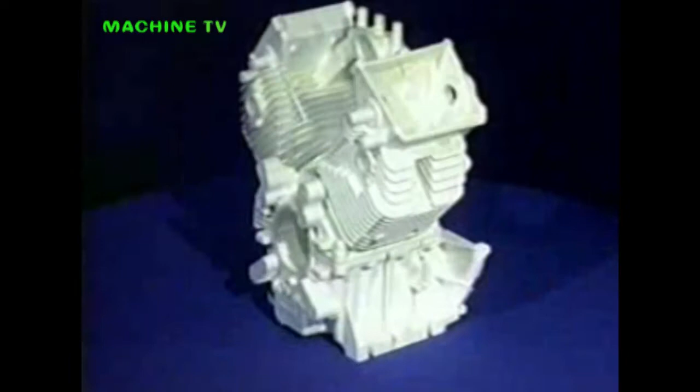The innovative metal casting process of the future is here today. Lost foam casting has been slow to develop, but is finally a technical and commercial success. The name lost foam refers to the process of creating a foam model of the casting and then replacing the foam with molten metal. The process begins with polymer beads, which must be expanded to a controlled low density for molding.

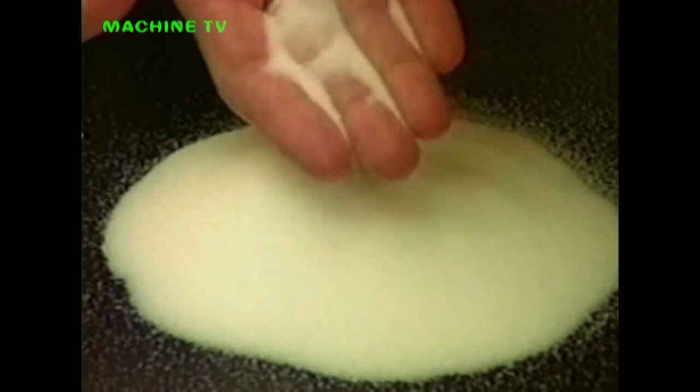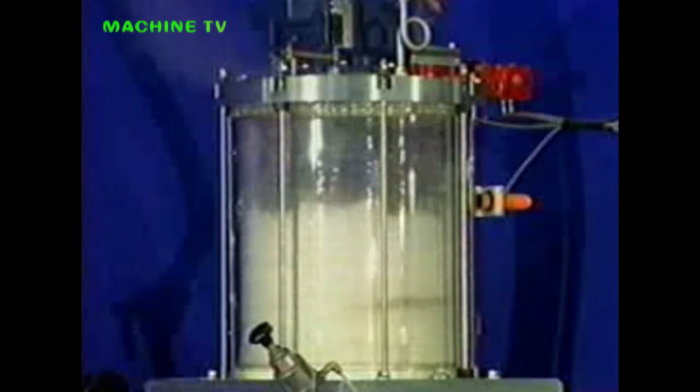The beads as purchased have a cellular structure and contain a gas or blowing agent, usually pentane. In a pre-expander, steam is used to heat the beads, softening the polymer and expanding the gas. Control of density and bead distribution is critical in this operation. After pre-expansion, the beads must be stored for stabilization before use in molding. A distribution system delivers beads from storage to the molding machines.

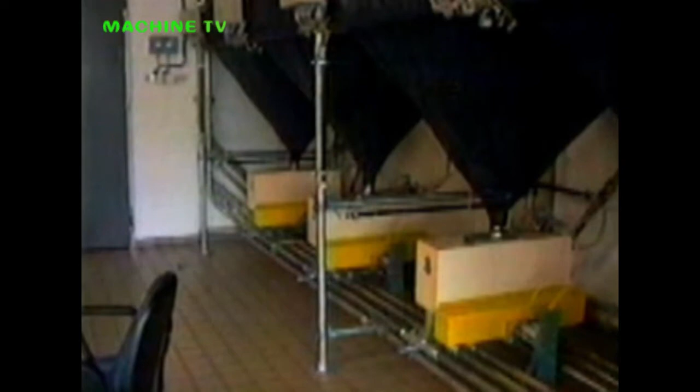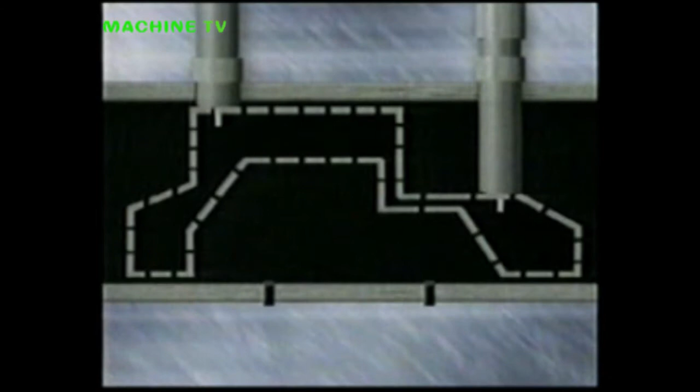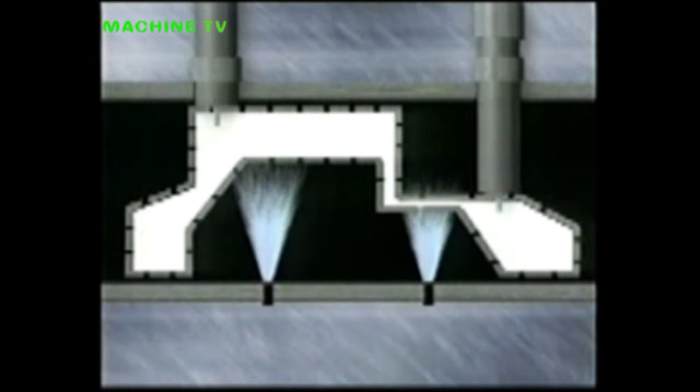Tooling mounted in a molding machine provides a cavity in the shape of the casting or a portion of the casting. The preheated cavity is completely filled with beads through fill guns. Steam is again used for heat and now enters the cavity through vents and further heats the tool from the back side. This causes the beads to expand into the voids and to fuse together. The fused foam and the tool are cooled by water and vacuum to allow the foam to be removed from the tool.

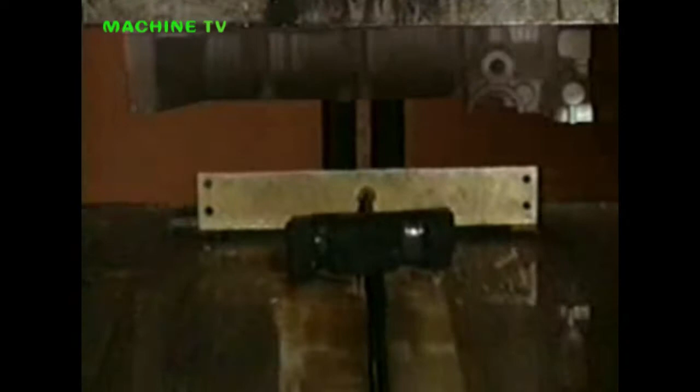Tooling is typically machined polished aluminum, producing very precise dimensions, and an unusually smooth surface finish with precise detail. The tooling is exposed to only non-abrasive beads and steam temperatures, and usually maintains surface finish and original dimensional accuracy throughout an extremely long life. Foams are normally aged, usually in a controlled warm air oven, to stabilize the dimensions.

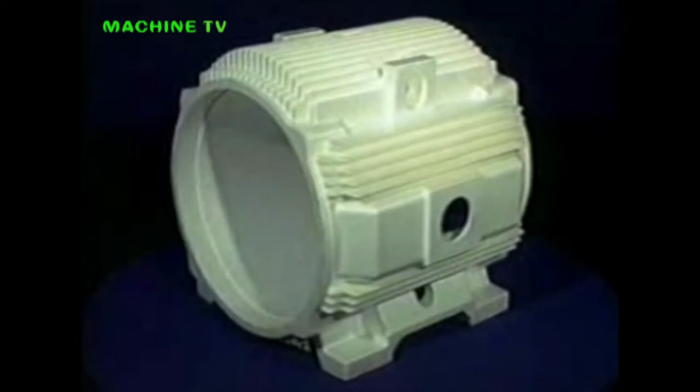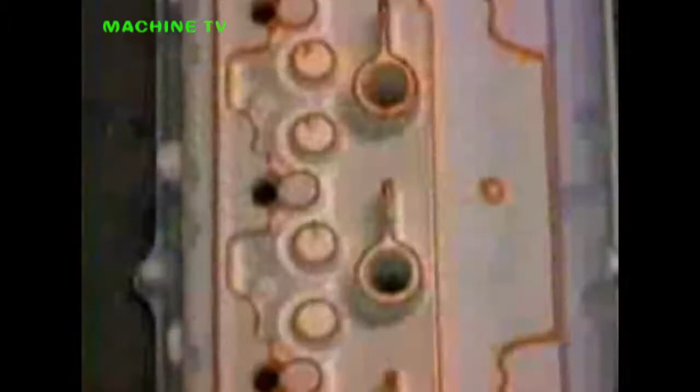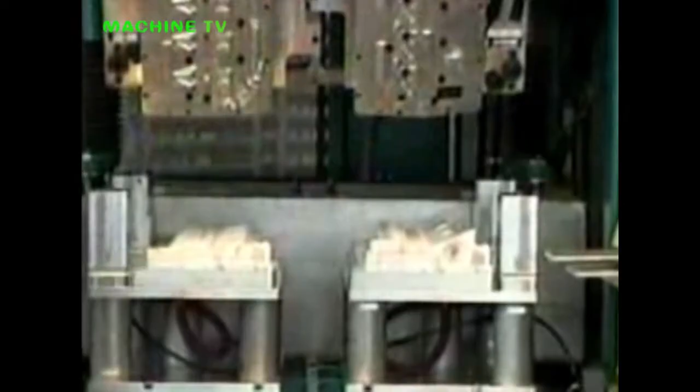Foams can be molded in one piece, sometimes using movable pulls. Multiple pieces can be glued together to form extremely complex parts with internal passages and detail sometimes not feasible in other processes. Gluing is normally done with special hot melt glue, printed on the parting line between foam slices. Excellent dimensional tolerances, appearance and casting quality can be achieved when flat glue lines are properly designed and when tooling and equipment have proper precision and control.

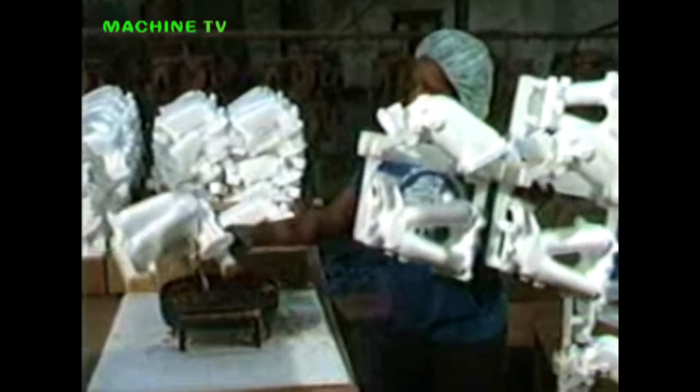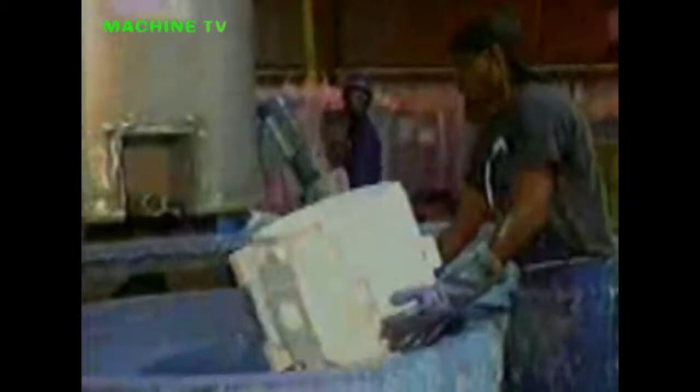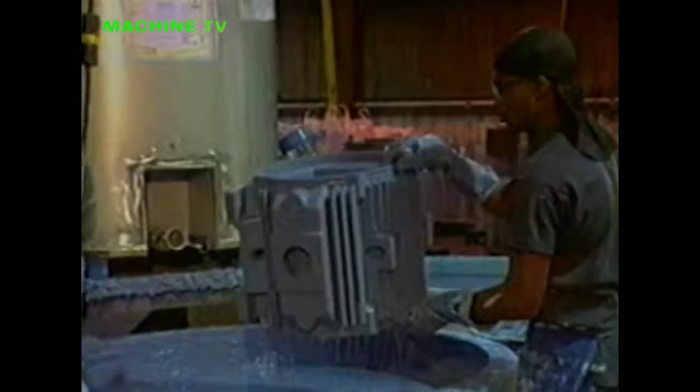Foam replicas are then assembled with a gating system to form a cluster of parts to be produced in one flask. This can be done manually or by machine. Foams or clusters are then dipped in a water-based refractory coating which covers all surfaces of the foam, including internal passages. The coating will now have an internal surface equal to the outside surface of the foam. The wet, coated foam cluster is then placed in a drying oven to remove the water. Ideal process control and throughput are achieved with dehumidification and internal humidity control.

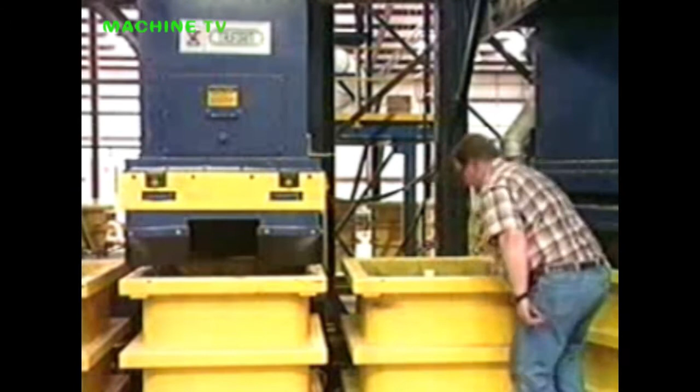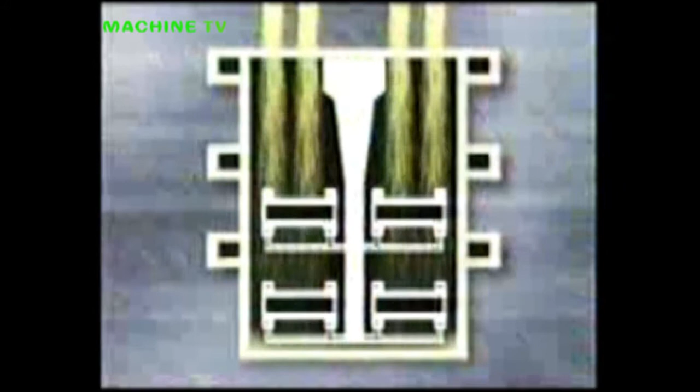The coated dried cluster is placed in a special steel flask, either manually or automatically. Dry sand with no additives is then rained around the cluster and vibration is applied to the flask. Inside, the vibration of the flask causes a layer of sand near the surface to fluidize. In this layer, the sand flows around and into the inside passages of the foam. The sand level rises as additional sand is rained in.

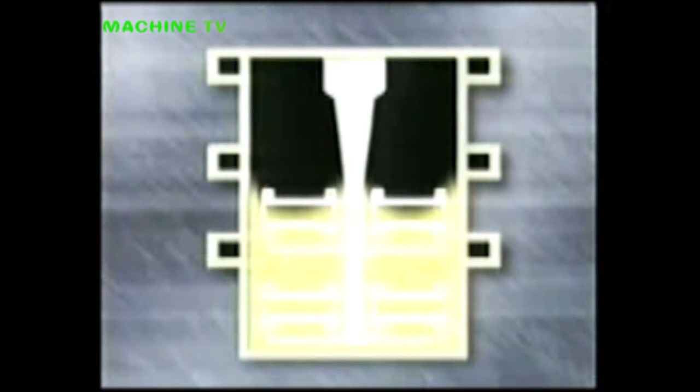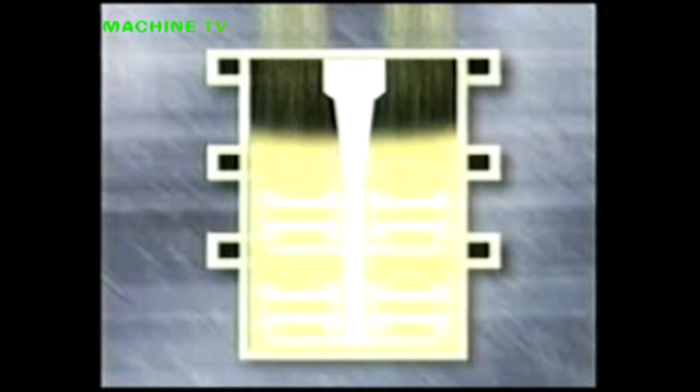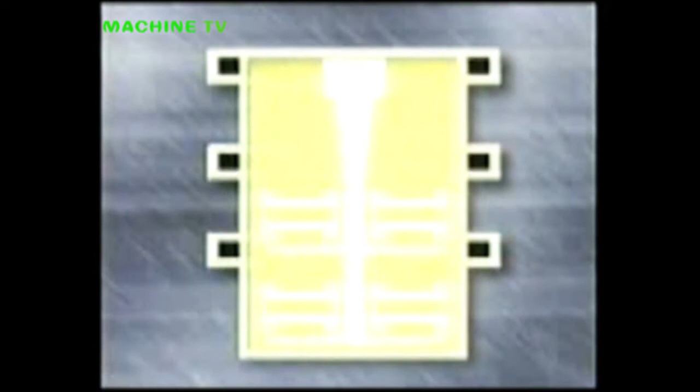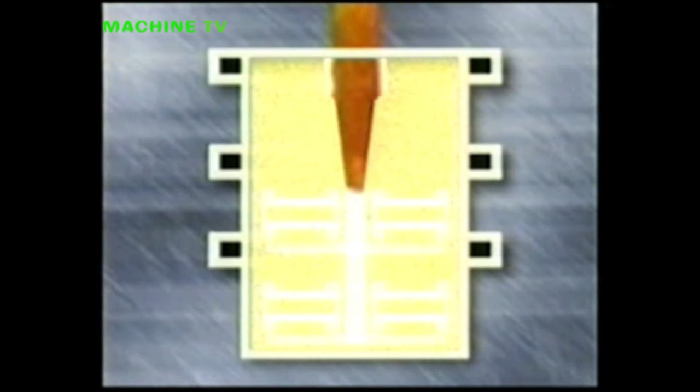Below the fluidized layer, the weight of sand above, together with vibration, causes the sand grains to move closer together, compacting them. The vibration and the flowability of dry sand causes densities of the compacted sand around the coated foam to be 10 to 15% higher than in other sand processes. Proper control of vibration and sand fill can ensure low foam distortion and full rigid backing of the coating. Some systems use synthetic mullite in place of sand to further improve cycle times and dimensional tolerances. After fill and compaction, molten metal is poured into the cluster.

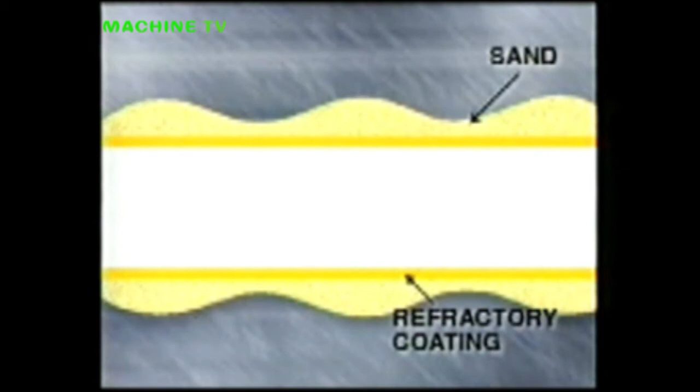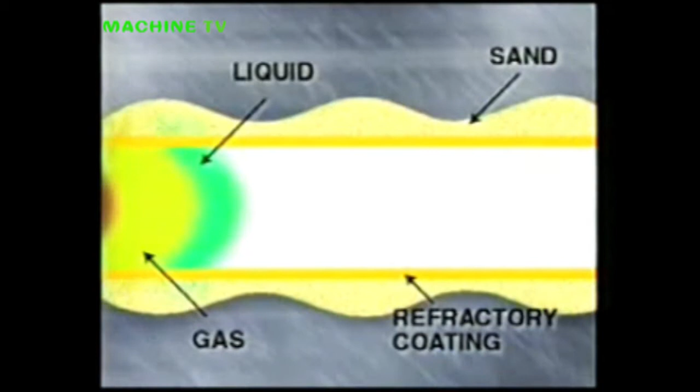As the liquid metal moves inside the coating, the heat energy causes the foam to liquefy, evaporate, and break down chemically. The temperature of the metal poured and the foam characteristics will determine how much liquid, vapor, and gas will be formed. Special coatings have now been developed for various types of castings, which have capillary action to absorb liquids, as well as permeability to allow passage of vapors and gases. Because there is nothing in the sand to burn out, creating collapse or mold wall movement, dimensions are very accurate.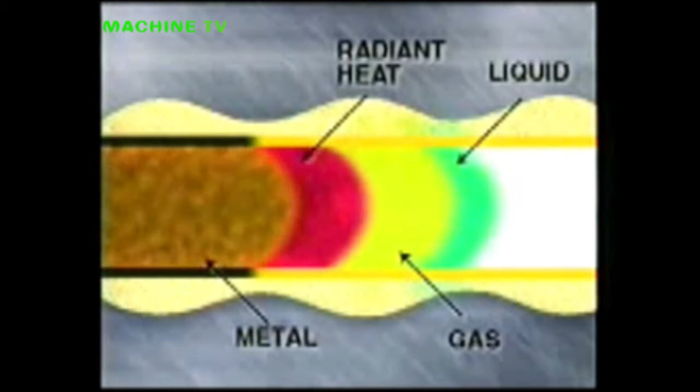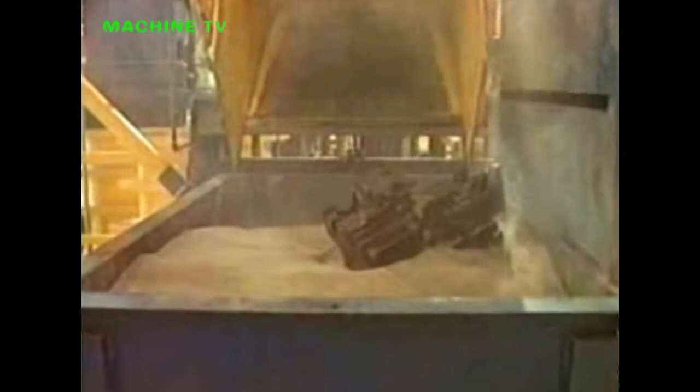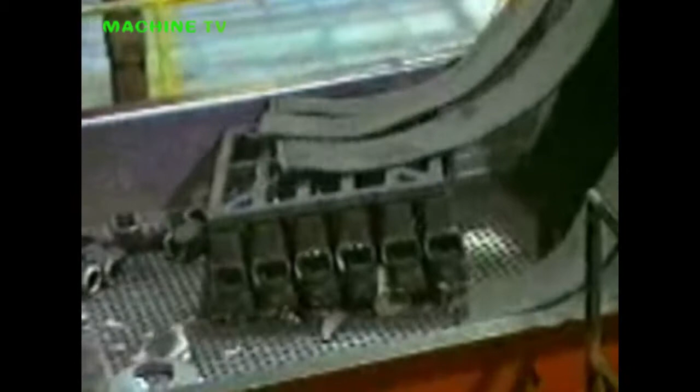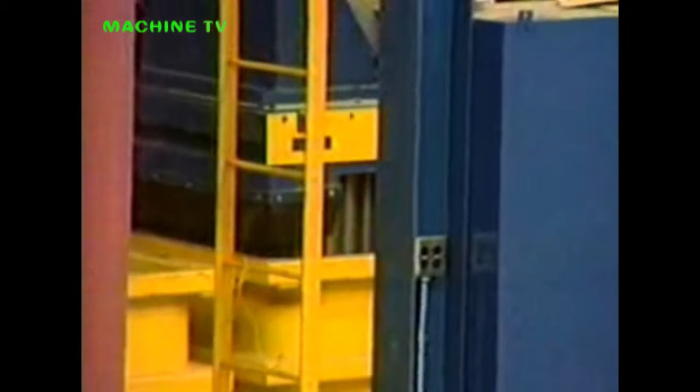After the poured cluster is allowed to solidify, the flask can be simply tipped over and the unbonded sand flows out. No additional violent shakeout or core removal are necessary. Because the foam pattern is left in the mold, no parting line is needed. This allows orientation of the casting to be more flexible and permits clustering, which produces more parts in a given mold area. More parts per mold means higher production at slower mold per hour rates. The dry, unbonded sand is easily recycled with minimum energy consumption.

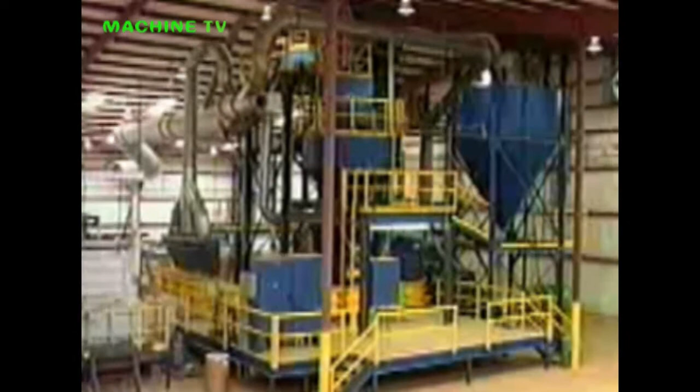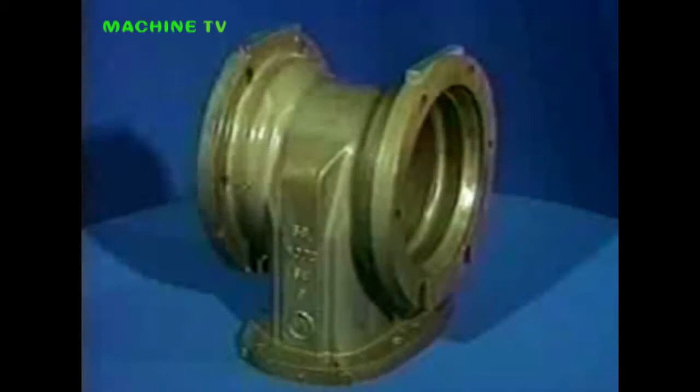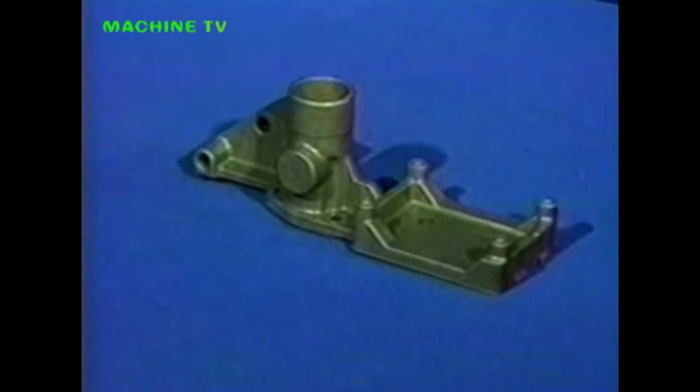The mass of foam is low compared to the binders burned out in other sand processes, reducing emissions. This makes lost foam an energy and environmentally friendly process. Because there are no cores, core defects and fins are eliminated. Binder and moisture-related defects are also eliminated. No parting line eliminates shift and parting line fins. These benefits reduce grinding and blasting. Many additional benefits can be realized in the finished part due to the increased design freedom of lost foam.

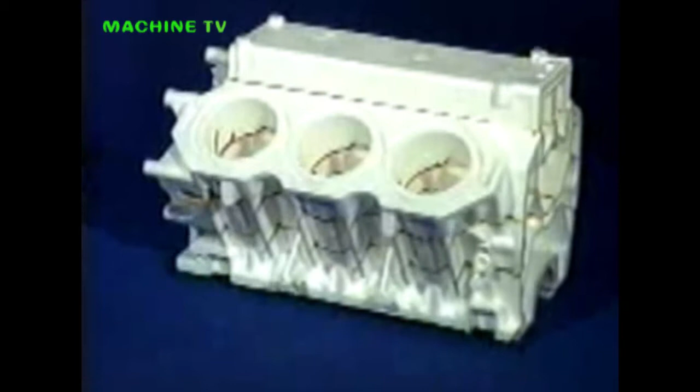Much of the standard foundry work includes draft and fillets that has been traditionally put on parts. In lost foam, we start without that, and therefore the foundry produces a lower weight casting because we're not adding the draft, fillets and things that we traditionally do. Anytime you combine parts, multiple parts into one, you have much less chance for variation both in the machining and the assembly. The reliability of one single piece component as opposed to 3 castings assembled together is much higher.

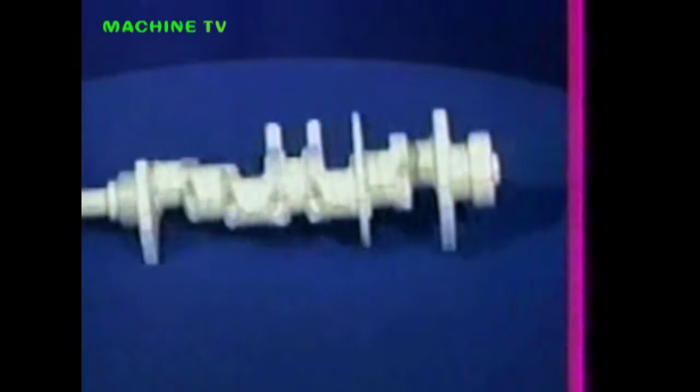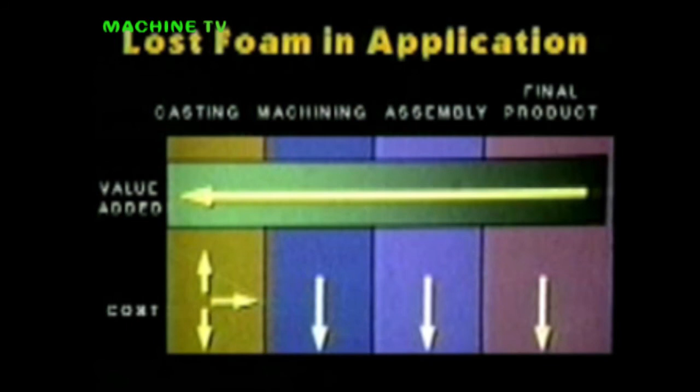The benefits can only be achieved by re-engineering the part or even the final product to fully utilize lost foam. Lost foam can significantly reduce the final product cost by bringing value added to the casting. The lost foam process has benefited from automotive industry emphasis, but now is very effectively being applied to non-automotive products. More and more products are being re-engineered to lost foam as the process gains acceptance. Lost foam is here today as a production-ready process and can only continue to grow and improve.